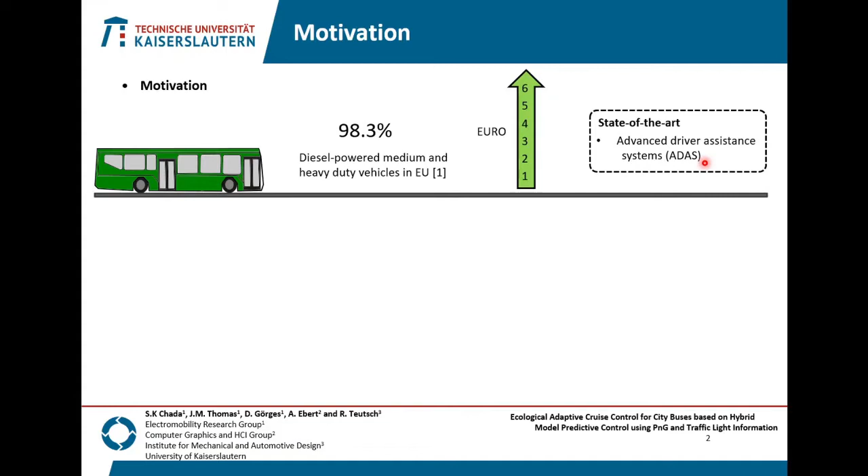To address this concern, over the past decades, researchers have been actively investigating advanced driver assistance systems that can promote energy savings in commercial vehicles and in turn help reduce their CO2 emissions. To improve safety and driving comfort for the driver, present-day vehicles in the market are equipped with advanced driver assistance systems such as adaptive cruise control, lane departure warning assistance, emergency braking assistance, etc. Recent studies point towards more advanced adaptive cruise control concepts such as ecological adaptive cruise control, with the aim to minimize the host vehicle's energy or fuel consumption in addition to improving safety and driving comfort.

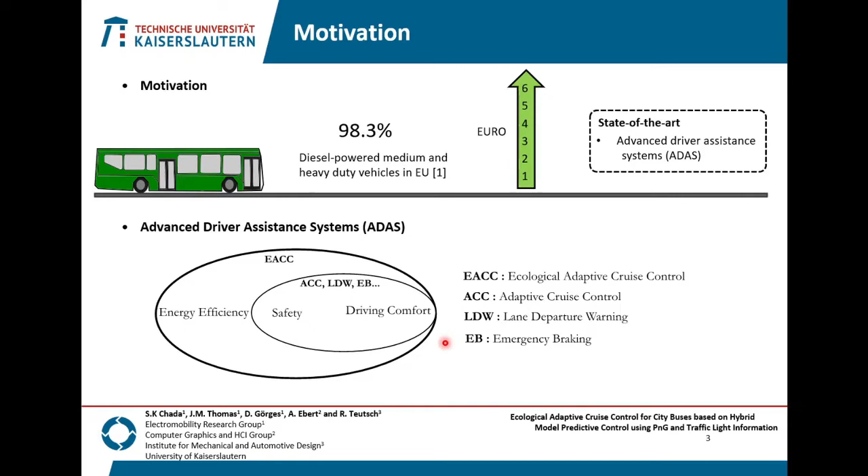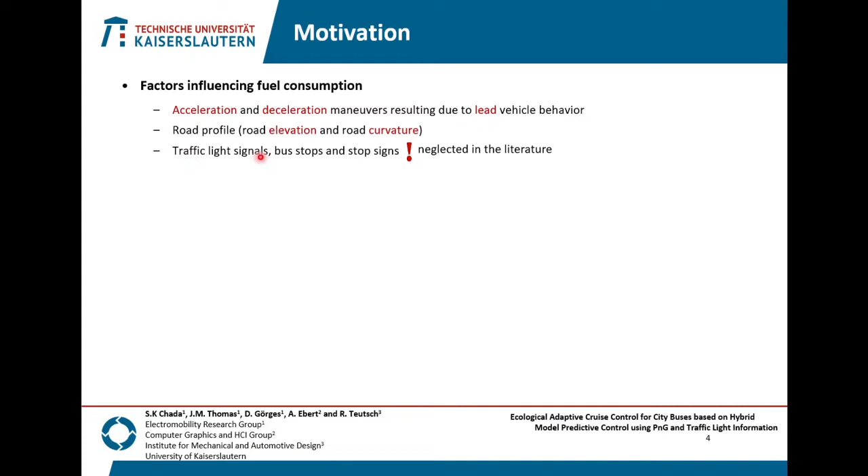Now let us look at the factors influencing the fuel consumption in a conventional city bus. Primarily, the fuel consumption is influenced by the acceleration and deceleration maneuvers resulting due to the lead vehicle behavior. Secondly, the influence of the road profile, for example the presence of road elevation and road curvature. Furthermore, the influence due to other important factors in urban environments such as traffic light signals, bus stops and stop signs have often been neglected in the literature.

Previous literature on energy-oriented ADAS in commercial vehicles focused on predictive or look-ahead cruise control strategies and eco-driving assistance systems. Algorithms such as dynamic programming and Pontryagin's minimum principle have shown to yield a global minimum, however were found to be computationally intensive and not suitable for online implementation. To address the limitations of DP and PMP in terms of computational complexity, model predictive control is being widely used to facilitate online control and effectively deal with state and input constraints.

Previous literature on ecological adaptive cruise control concept focused majorly on car following scenarios in which the host vehicle plans an optimal speed trajectory while tracking a preceding vehicle. One promising driving strategy to reduce fuel consumption in a conventional vehicle is pulse and glide, in which the vehicle is accelerated to a higher speed than the desired speed in the pulse phase and then allowed to coast until a lower speed by turning the engine off in the glide phase. Such a strategy has been proven to be efficient in achieving fuel savings.

To control the engine on-off state, a binary variable must be incorporated into the optimization problem, thus making the hybrid model predictive control approach an ideal choice for the longitudinal control in conventional vehicles with ICE, to control both continuous and discrete time variables. To be applicable for urban environments, the existing problem formulations certainly need a revision in terms of including additional constraints which have a significant influence on the energy consumption.

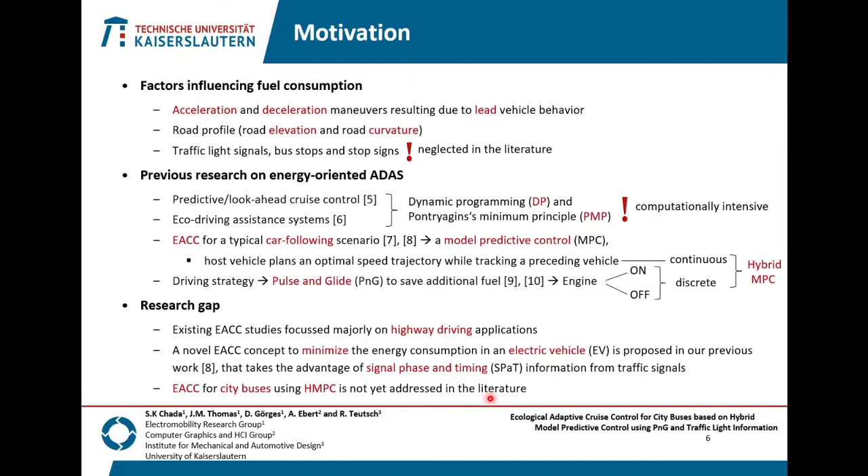An effort was made in our previous work to propose a novel EACC concept to minimize the energy consumption in an electric vehicle by taking advantage of signal phase and timing information from traffic signals. To the best knowledge of the authors, EACC for city buses using HMPC is not yet addressed in the literature. Therefore, in this work, contributions are made to fill this research gap.

The primary objective of HMPC EACC is to minimize the fuel consumption in a conventional city bus in the following scenarios. First, while tracking a leading vehicle in a vehicle following scenario and maintaining a desired inter-vehicle distance to the preceding vehicle. Next, in freeway scenarios, by tracking a green wave reference velocity to pass through signalized intersections at a green phase, thereby avoiding frequent stops at traffic light signals.

Also, while approaching bus stops and unavoidable red traffic light signals, the host vehicle must plan to stop fuel efficiently. Additionally, the host vehicle must apply the PnG strategy and optimally turn the engine off whenever necessary. Besides these, objectives such as vehicle safety and driving comfort must be ensured.

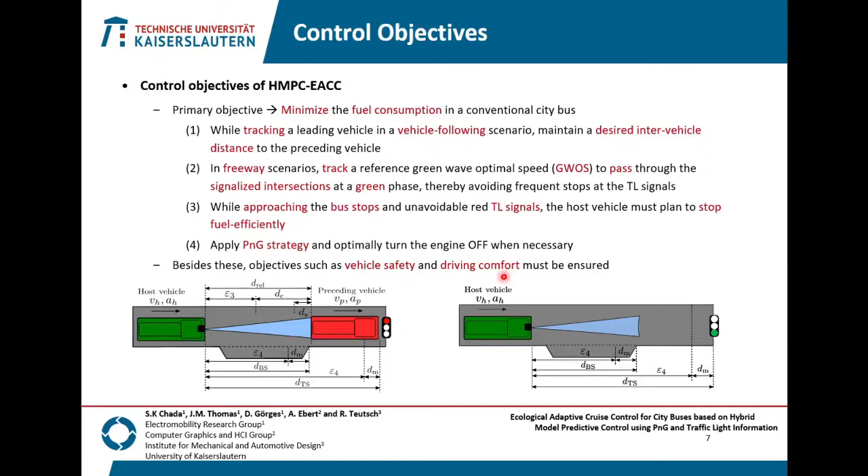In this slide, we shall look at the system dynamics. The longitudinal dynamics of the host car are influenced by the longitudinal forces and vehicle resistances and can be mathematically described using the equation here, in which Ft, Fb are the traction and braking forces, Fr, Fa and Fg are the rolling, aerodynamic and grading resistance forces.

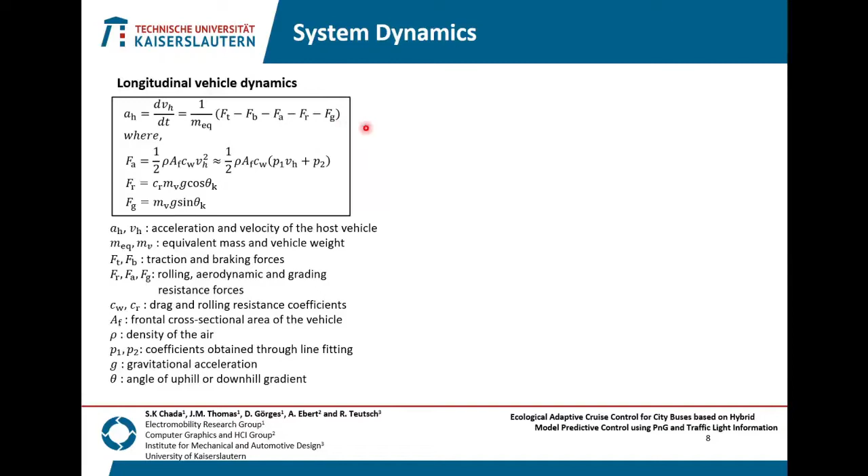To represent the city bus engine speed torque characteristics, a reference engine map OM668 of a passenger vehicle is chosen from the ADVISOR library and is scaled using a simplified approach.

Firstly, a torque scaling factor is determined by dividing the maximum torque of the new engine by the reference engine. The torque values of the new engine can be obtained by multiplying the reference engine torque values with this factor. Similarly, a scaling factor for the angular velocities of the new engine can be obtained.

Furthermore, the new engine efficiency can be determined using this equation, where HU is the lower heating value of the diesel fuel, and TE new and omega E new are the scaled torque and angular velocity values obtained from the above. Here, the fuel flow rate map of the reference engine is used.

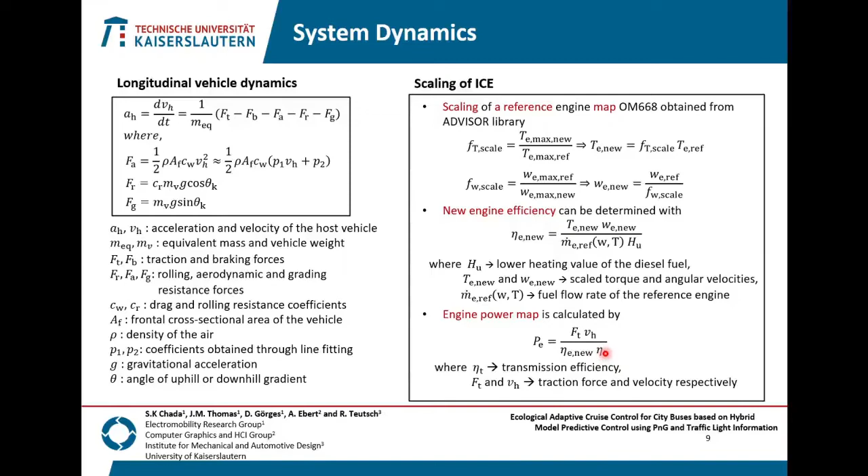Furthermore, the engine power map is calculated by this equation, where eta T is the transmission efficiency, and Ft and Vh are the traction force and velocity respectively.

Approximating the nonlinear power consumption map using this equation has a deviation in the accuracy at lower traction values. For instance, when Ft is 0, the approximated power must ideally be 0. Thus, in a pulse and glide phase while the engine is off, the resulting energy consumption will also be 0.

However, the approximated power calculated using this equation at Ft equal to 0 is found to have a value greater than 0, thus motivating the engine to remain on at all times, which is not desirable. To tackle this issue, an idea is presented in the further slides.

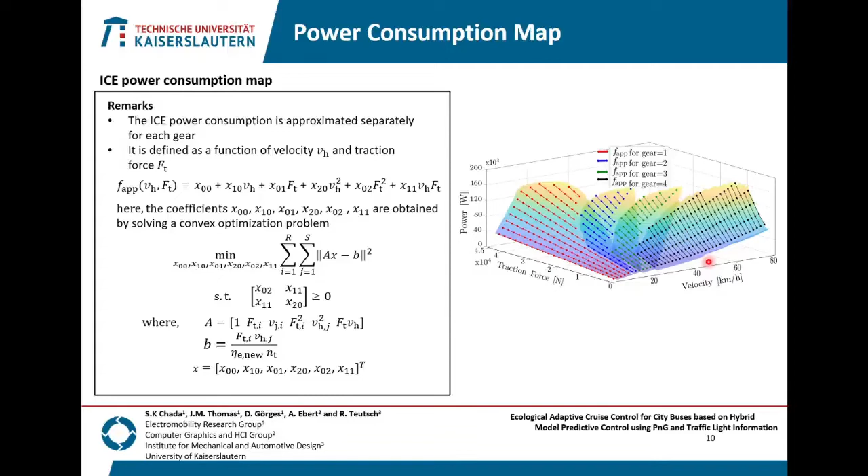With regard to constraints, firstly, due to vehicle physical limitations, the traction force is limited by the maximum traction force Ftmax, which is calculated offline for each gear, and the braking force by maximum braking force Fbmax. Additionally, there are regulatory constraints on road speed limits which the host vehicle must obey.

To ensure a safe distance to the preceding vehicle and track the preceding vehicle robustly by maintaining the desired inter-vehicle distance, additional constraints are provided as shown here. Moreover, to minimize jerks and increase driving comfort, the variation between the traction force at consecutive steps must be maintained within delta Ftmax.

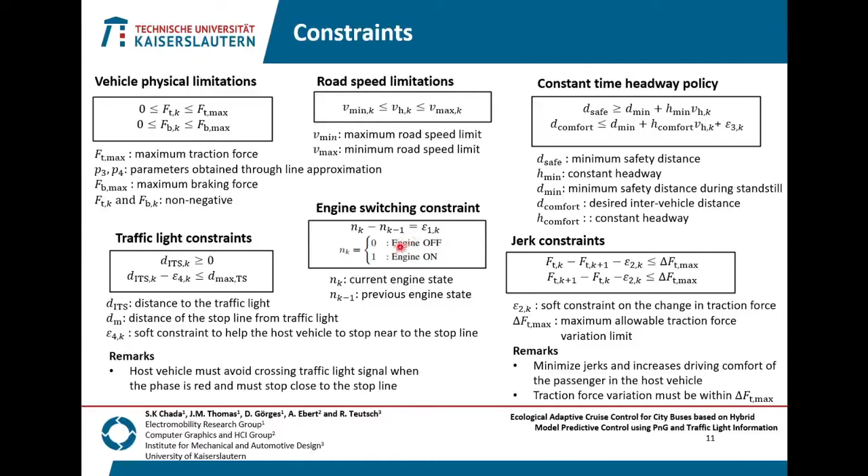The constraints due to traffic light signals are enforced such that the host vehicle avoids crossing traffic light signals when the phase is red and tries to stop close to the stop line in such a scenario. Finally, to avoid frequent switching between engine on and off states, a linear constraint is introduced.

The HMPC EACC optimization problem for a typical vehicle following scenario is formulated in time domain and is given here. The cost function consists of 5 terms. The first term is used to minimize the energy consumption of the host vehicle.

The variable PICE is constrained by 2 equations here. In order to compensate the error in power consumption approximation as discussed previously, an additional term is subtracted from the approximated power in this equation, where Pmax is a constant term which is the maximum available power at each gear and is computed offline from the original map.

If the engine is off, both equations force PICE to 0. Expanding the approximated power by substituting this equation makes the overall equation a quadratically constrained problem. Using the second term in the cost function, an excessive braking force is penalized.

In the third term, a slack variable epsilon1 is introduced to avoid frequent switching between engine on and off states. A linear constraint describing epsilon1 is given by this equation.

Furthermore, in the fourth term, the variation in the traction force at successive time steps is penalized using a slack variable epsilon2 if it exceeds a constant value delta Ftmax, with the aim to minimize jerks and improve driving comfort. Finally, to motivate the host vehicle to stay within the comfort region, another slack variable epsilon3 is penalized in the last term under the presence of these constraints.

The host vehicle velocity and relative distance to the leading vehicle in discretized form is given by these 2 equations, where Vp is the velocity of the preceding vehicle.

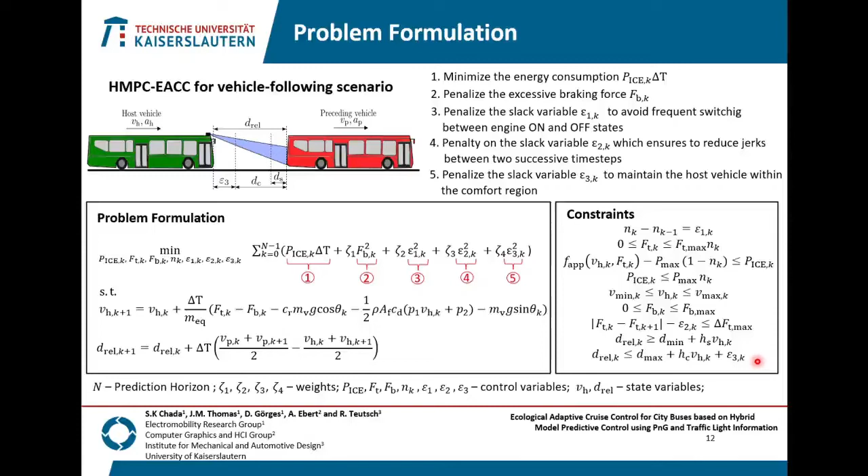To accommodate the additional constraints due to traffic light signals and bus stops during the longitudinal control, the previous optimization problem has been extended with an additional term.

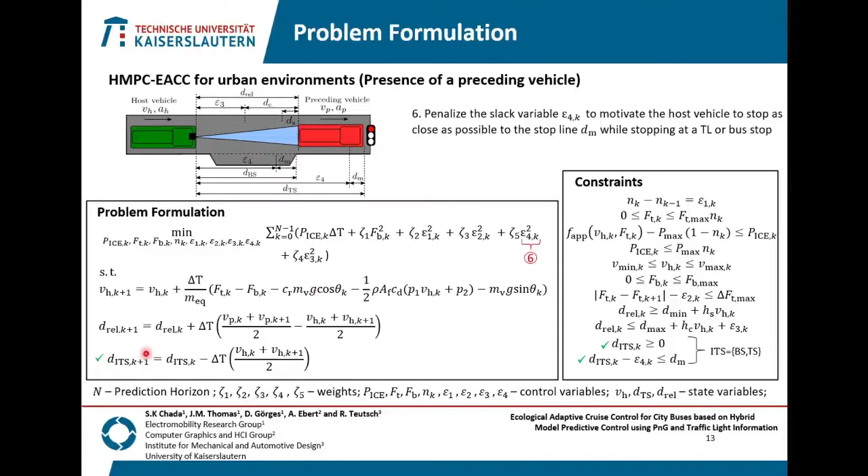The term here contains the slack variable epsilon4 along with the additional constraints, motivating the host vehicle to stop as close as possible to the stop line while stopping at a traffic light red phase or at a bus stop. Moreover, the relative distance to the nearest stop in discretized form is given by this equation.

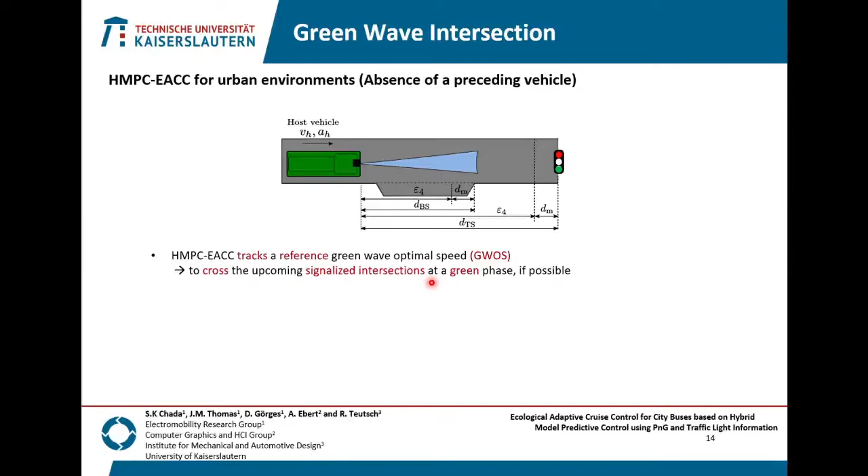Furthermore, in freeway scenarios, that is, in the absence of a preceding vehicle in urban environments, the HMPC EACC is advised to track a reference green wave optimal speed to pass through the signalized intersections at a green phase, thereby avoiding frequent stops at the traffic light signals.

We shall look in the next slide on how the green wave reference speed is calculated. Here, we have an exemplary scenario represented using a space-time diagram. It can be noticed that the city bus driving route consists of two signalized intersections and a bus stop.

The approach used to calculate a green wave velocity intersection is determined using this equation. Here, dTSI is the distance to the ith infrastructure. Rij and Gij represents the red and green cycle phase of the corresponding traffic light signals respectively.

It is to be noted that green wave optimal speed intersection using this equation is calculated for the upcoming traffic light signals alone, and bus stops are exempted because it is considered in this work that the host vehicle makes a compulsory stop at all the bus stops for a designated time period called bus dwell time, usually for boarding or alighting the passengers.

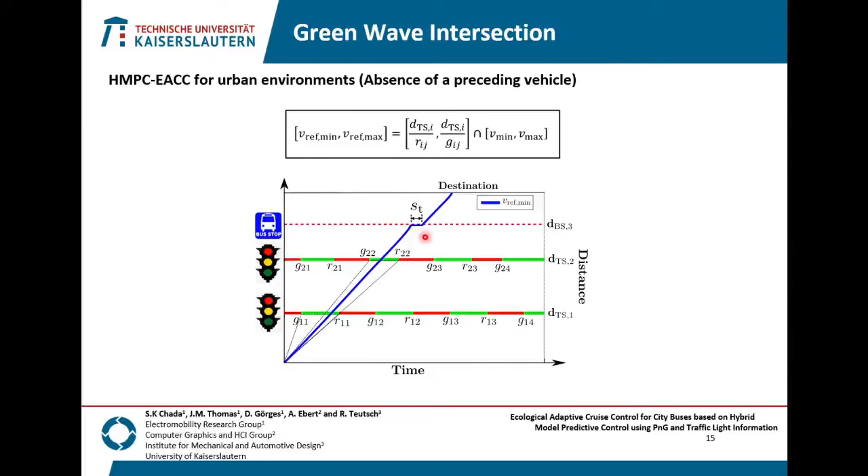To accommodate the reference tracking, an additional term is incorporated that enforces a penalty for deviation of the host vehicle velocity from the green wave optimal speed reference velocity. Rest everything remains the same. This is the combined problem formulation of HMPC EACC for the longitudinal control in urban environments.

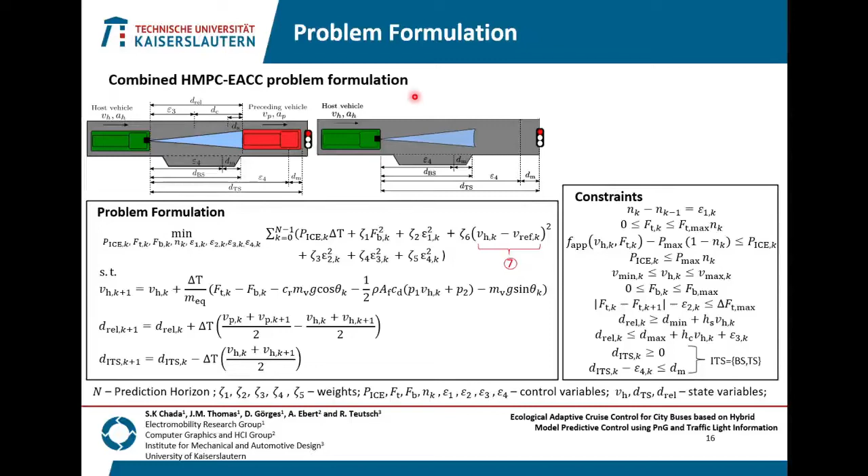To validate the performance of the HMPC EACC controller proposed in the previous slide, a problem formulation for a baseline controller is presented here. In comparison to the HMPC EACC problem formulation, one major difference is that the first term represents the approximated power consumption obtained, meaning that the PnG strategy cannot be realized in the baseline controller.

Additionally, it receives the information of only the traffic light signal's current phase information. Another major difference is that the baseline controller does not have the possibility to track a reference velocity for green wave and performs vehicle following throughout the trip. The overall problem formulation for the baseline controller looks like this.

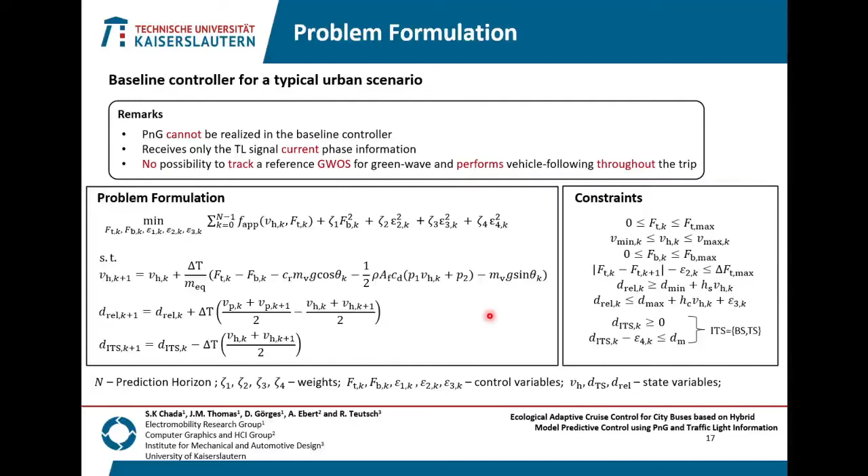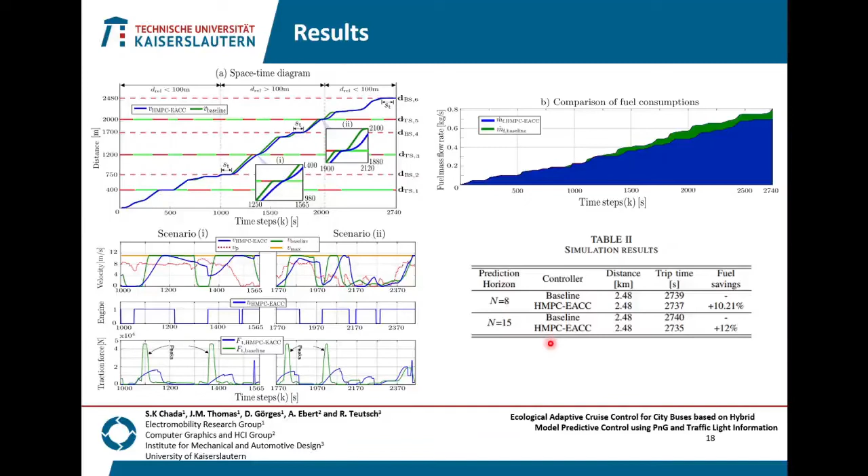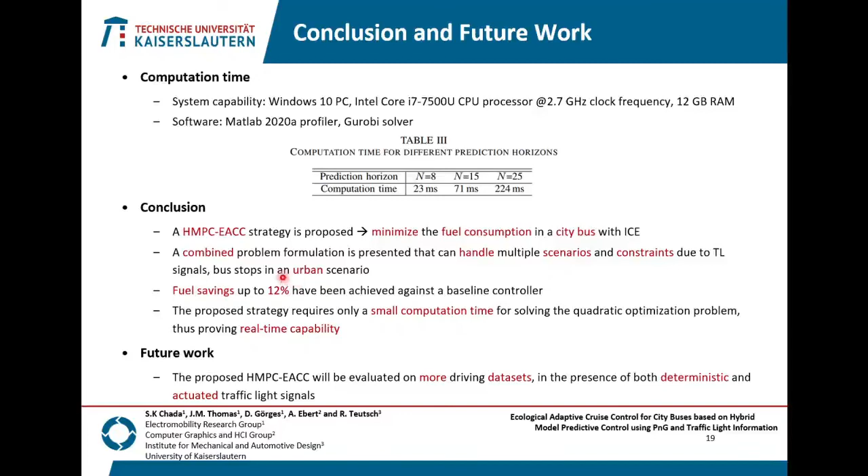To conclude, a HMPC EACC strategy is proposed in this work to minimize the fuel consumption in a city bus with ICE. To achieve this, a combined problem formulation is presented that can handle multiple scenarios and constraints due to traffic light signals and bus stops in an urban scenario. With such a controller, fuel savings up to 12% have been achieved when compared against a baseline controller.